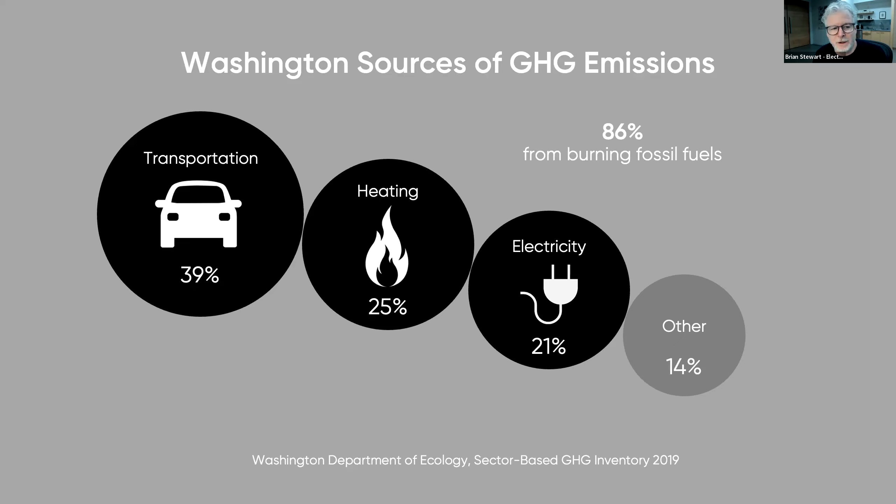The other thing that's really inherent in this chart, that might not be obvious at first, is that the reason why these three bubbles are so big and cause so much carbon emissions is because historically the only way we've been able to achieve these benefits of transportation, heat, and electricity has been from burning fossil fuels. So that is where these carbon emissions come from. But now there are new sources of energy that we can use for all of these things. And today we'll be talking, like I said, about heating.

If we look at our own homes and look at the picture in our own homes, it's similar in what you see. It's organized a little bit differently, but the energy that we consume for these same three things, electricity, transportation, and heat, accounts for about 60% of the carbon emissions in a typical home anywhere in the United States. The other portions of our carbon emissions come from the products that we buy.

So think of it as merchandise. Every time something arrives from Amazon or whatever, there's carbon emissions associated with making that and getting it to our homes. And then there's carbon emissions associated with the food we eat, and that being transported around the world too. And these two smaller boxes on the right, we can, through diligence and consuming fewer things, buying things locally, buying organic or regeneratively raised produce, all these things can help reduce those two boxes on the right, but it's hard

to eliminate them. But this big black box, the 60%, it's entirely possible to make that go to zero, to eliminate all the energy-related carbon emissions in your home. We've done it in our home. Sounds like our guest speaker tonight has done it in his home as well, and we'll be able to talk to you about why that's possible and why it's actually a great thing to do, and it's no compromise.

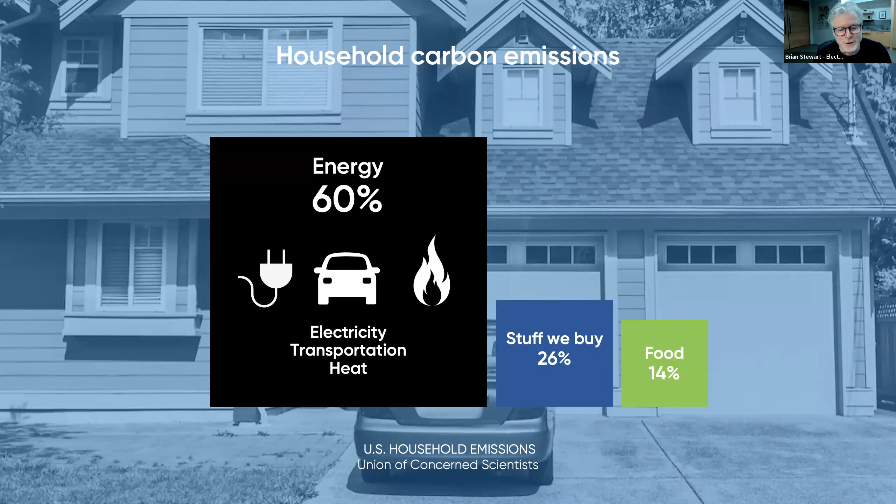All right, so the reason for all this is that electricity primarily has been using coal and natural gas. Of course, here in the Northwest, we have a lot of hydro and more and more solar and wind, but historically it's been coal and natural gas. We use gasoline and diesel for our transportation, and natural gas, and to some degree propane, more in the rural areas, to heat our homes and buildings.

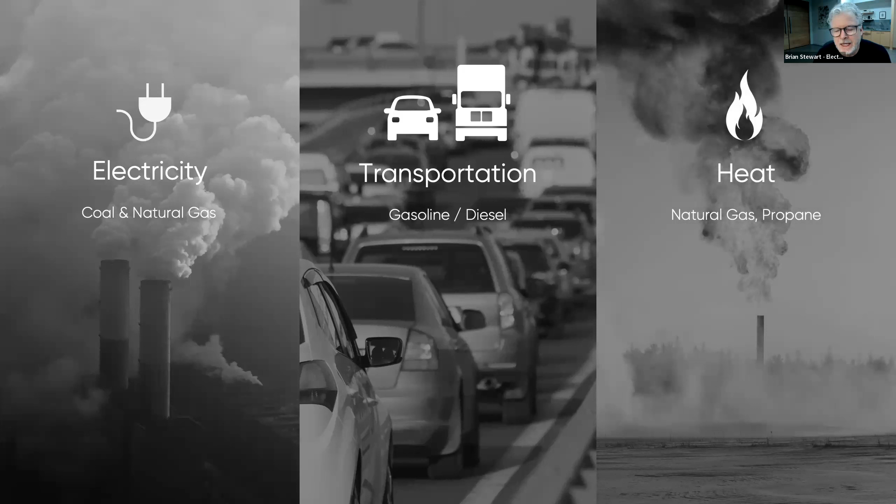I like to focus on the heat part because I think everybody gets that coal plants are bad, and you can smell the pollution from your car every time you turn it on, but most people don't have the same kind of awareness about how bad natural gas is for the environment. It's similar or worse to coal, partly because so much of it escapes from the devices that we own, from the pipelines that carry this under really high pressure over massive distances. So when you add up all those, what they call fugitive emissions, plus the combustion, it's similar or worse in some cases than coal in terms of its impact.

It's one of the major sources of air pollution. Again, it's not something we talk about because we're aware of that smog that comes from traffic, and if you have a power plant nearby, you can see it coming out of the smokestack, and you don't really see this pollution that comes from our homes, but it's one of the largest sources in California, for example. It's becoming the largest source as their electricity gets cleaner and their transportation gets cleaner.

And then the other thing is that there's a lot of misinformation out there, primarily coming from some of the gas industry, about things like renewable natural gas, which are good products. It's a good idea, renewable natural gas, but there's nowhere near enough of it, and it won't save us from having to get off of gas. It's got some good uses, but it's not the equivalent, let's just say, of solar power or wind power, where we'll have clean electricity flying down the electric lines.

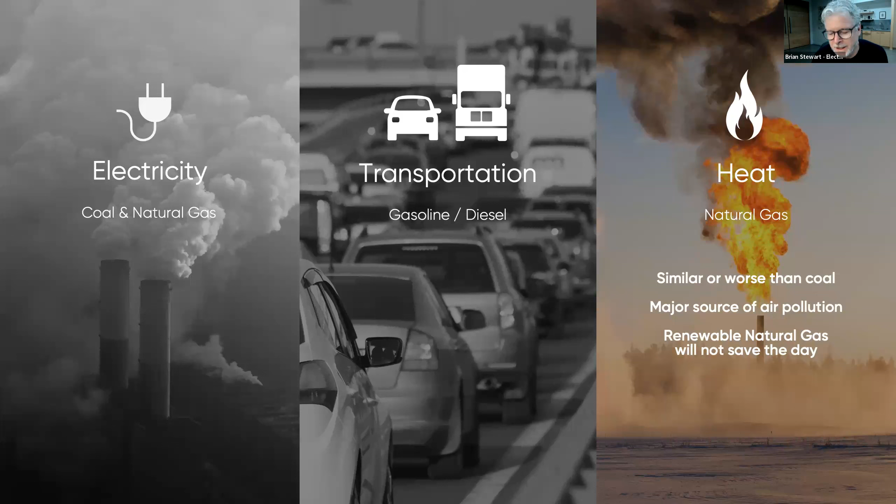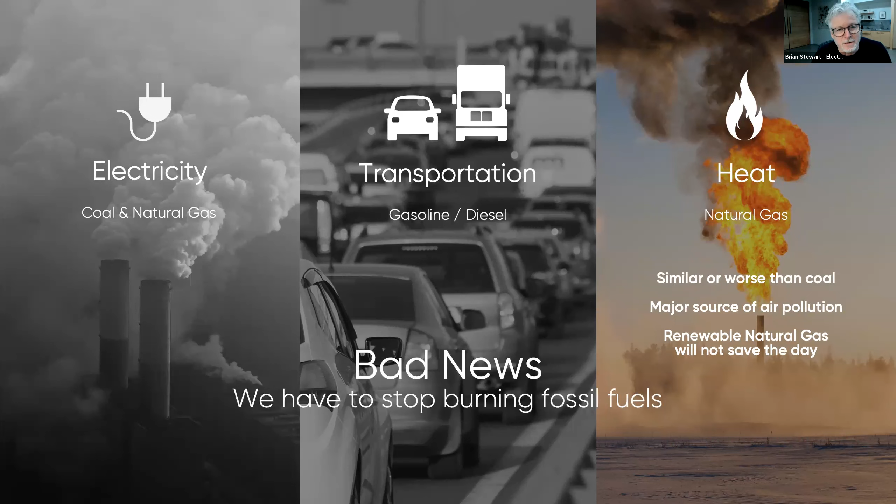And that's what's happening with solar panels. They're getting cheaper and cheaper to make. They get more and more efficient all the time. The same thing's happening with wind turbines. We're finding ways to make them for lower costs and make them much, much more energy efficient in capturing energy from the wind. So that drives costs down. And the more of them we make, the better we get at it, the cheaper it gets.

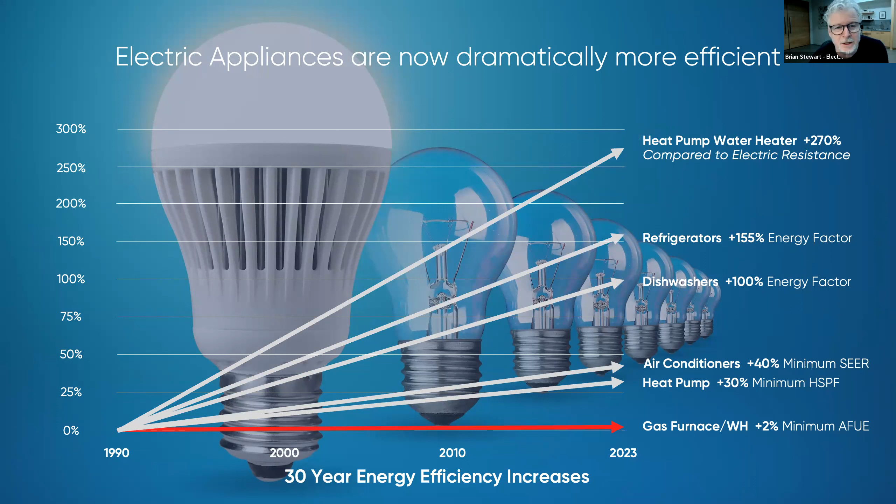And a heat pump water heater, which we're not going to talk about too much today, but it's another amazing technology that you should be familiar with, is incredibly energy efficient. It's almost 3 times more energy efficient than an electric resistance water heater. And then LED light bulbs, which of course, I think are almost the poster child for energy efficiency and electrification. They use 1/5, or you can say they're 5 times more energy efficient than an incandescent bulb, and they last longer and have all these other benefits.

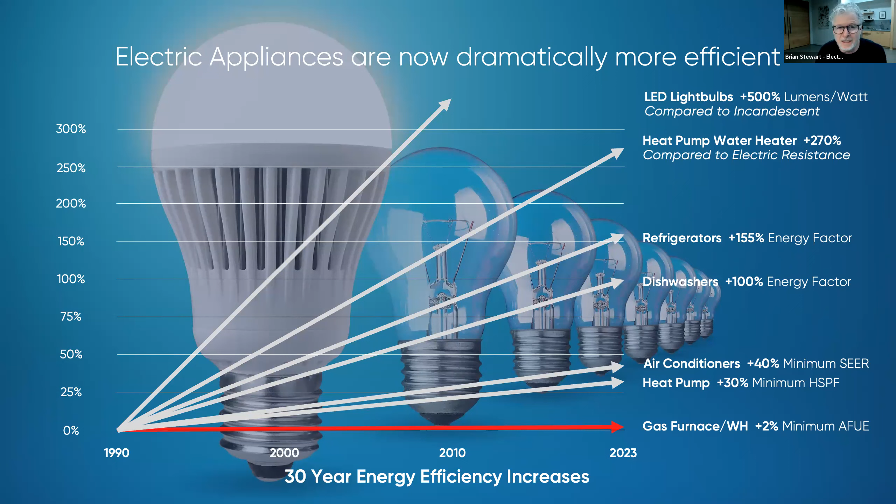So with all that news, like cheap renewables, really efficient electric devices that do everything that we need them to do, you almost can't escape this idea that we should be electrifying everything. And you'll hear that terminology being used. And it's really conjuring up this sustainable future where the wind and the sun power all of our primary energy needs: electricity, transportation, and heat. And by the way, transportation, I hope you guys are seeing some of those Amazon electric vans starting to deliver products to your home with really high efficiency electric devices, but that's happening as well.

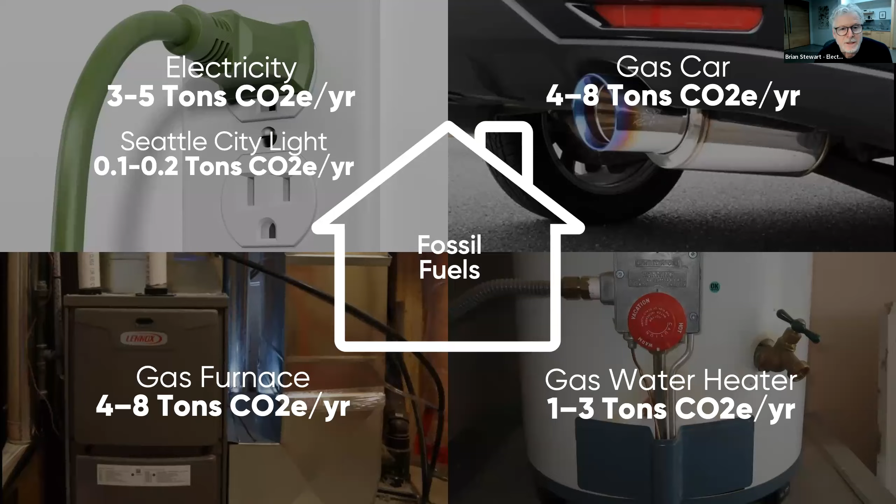Okay, so let's compare that to a home that's using renewable energy and has electrified, and you could be getting 100% renewable electricity. Like I say, Seattle City Light is very close to that already. With renewables, you would be getting 0 tons from your electricity use. And then you charge your electric vehicle with that clean energy. That means it's producing 0 tons, driving thousands of miles a year with no carbon emissions. You can heat and cool your home for 0 tons of carbon emissions. And you can heat your water also with 0 tons of carbon emissions.

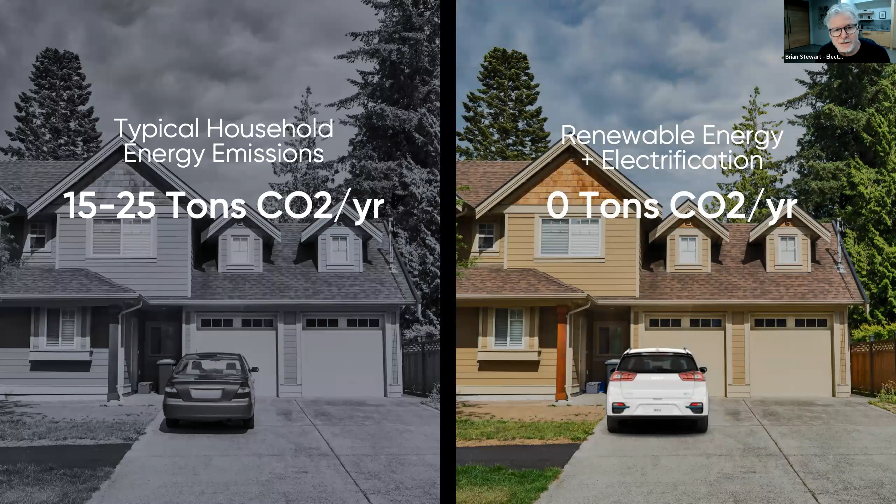And so, we'll be hearing from someone who's done this in their own home later on. But this is amazing. Think of this comparison from today, where a typical home in Washington would produce somewhere between 15 and 25 tons of carbon emissions per year from the energy that we consume, and a renewable energy plus electrification home, that's 0 tons. But the other dramatic thing that happens is energy costs go down quite substantially.

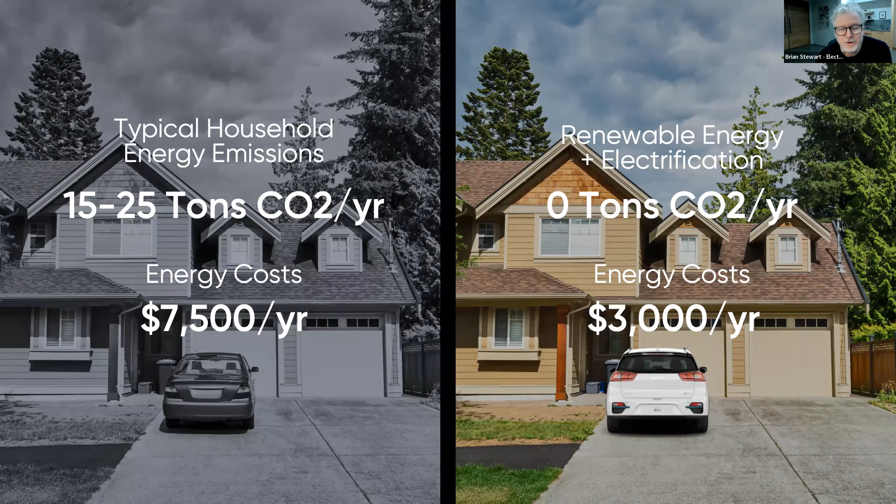For a typical home with 2 cars, you would be expecting to pay about $7,500 a year between your electric bill, your natural gas bill, and the gasoline that you purchase to put in your cars. And that would compare to $3,000 if you had 2 electric vehicles and a heat pump water heater, etc. So, $4,500 a year saved from energy costs after you've made this transition, which is why, again, there's so much interest in this topic.

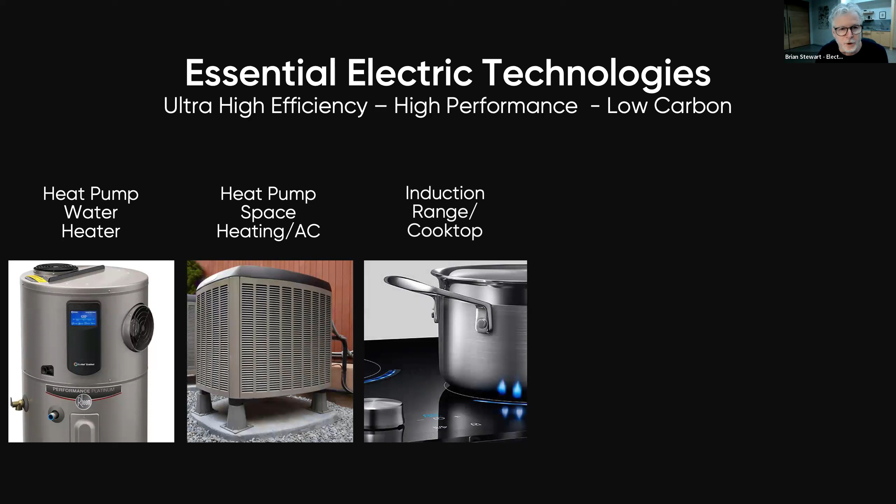All right, so the technologies that make this possible in our homes are heat pump water heaters, which I've mentioned, heat pumps for space heating and also for air conditioning, induction ranges and cooktops for cooking to replace gas stoves, electric fireplace inserts, which will replace gas fireplace inserts, and heat pump dryers, which are the most efficient way to dry our clothing, and then electric vehicles, as we mentioned. So today, we're really only going to be talking about heat pumps for space heating and air conditioning.

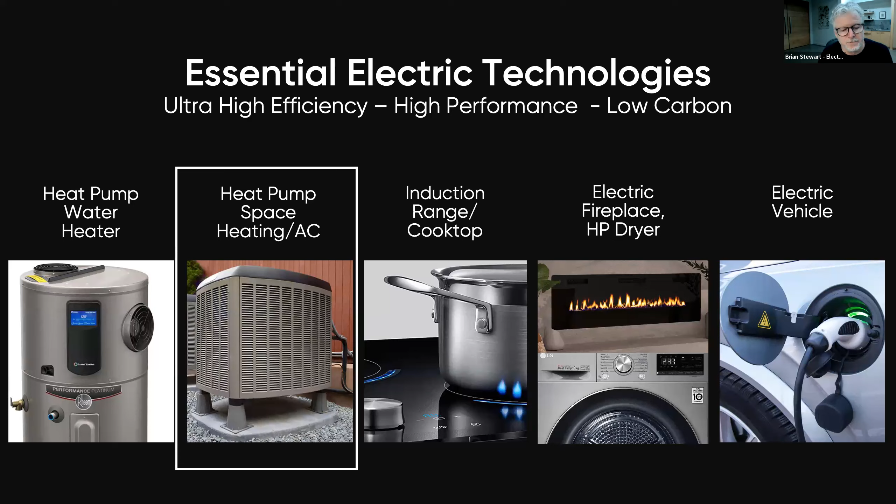But all of these devices deserve the same kind of attention because they're all amazing in terms of their ability to provide really great performance and also reduce our energy expenditures. Okay, so heat pumps for space heating and air conditioning. It's important to know that this is not some kind of compromise or some sort of second best way to keep warm. This is actually a better technology because, for one thing, it provides heating and cooling with one system.

So gas furnaces, of course, can't do that. And air conditioners tend to be lower efficiency than heat pumps, which we'll talk about. So there's energy savings on the cooling side and on the heating side with heat pumps. They provide incredibly constant temperatures, and that's because they operate almost continuously. And that means that if you set your thermostat to 70 or 72, whatever you're comfortable with, it's going to stay exactly that temperature, and it will be that temperature almost throughout your whole home.

Whereas a furnace, which produces huge amounts of heat, has to turn on and off and on and off. And that means that the temperature in your home, you set your temperature at 72, for example, is probably going to go up to 74 and then down to 68 and then up to 74 and down to 68, etc. And that means that it's only on for a short period. So it's really warm next to the registers and not so warm on the other side of the room. Whereas with a heat pump, it's moving all the time.

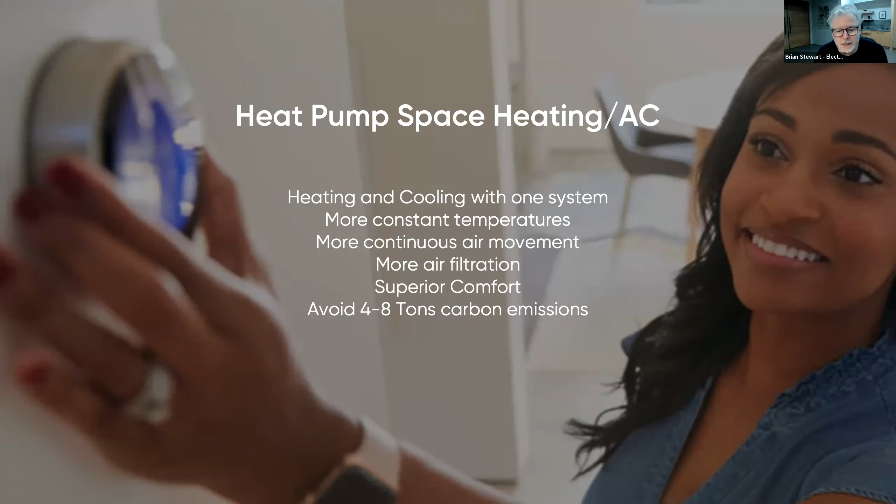The air is moving through your house all the time. So it's going through the air filters more continuously, which means you have really clean indoor air, more air filtration. All this adds up to superior comfort, people report, and there's dehumidification benefits that come along with this as well that are sometimes important. Not so much in our climate, but in some areas that's really important. And all of this comes along with a 4 to 8 ton reduction in carbon emissions per year. So it's pretty dramatic.

Heat pumps can sound pretty, I don't know, science fiction-y and hard to explain to people. And I won't go into the physics because it is a little hard to explain. But on the other hand, these devices are things that are super familiar to us. I mean, our refrigerator is a heat pump. The way it works is it's moving heat from inside that closed box to your kitchen. So maybe you felt that warm air coming from behind the refrigerator, or sometimes it's blown from underneath. So it's slightly warming your kitchen and you barely notice that. But inside it's dramatically colder. Obviously in the freezer, it can be down to 0 degrees.

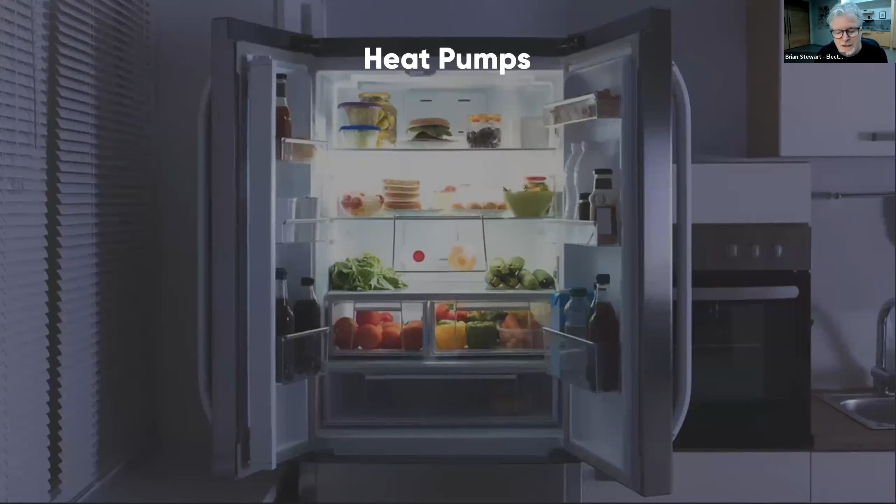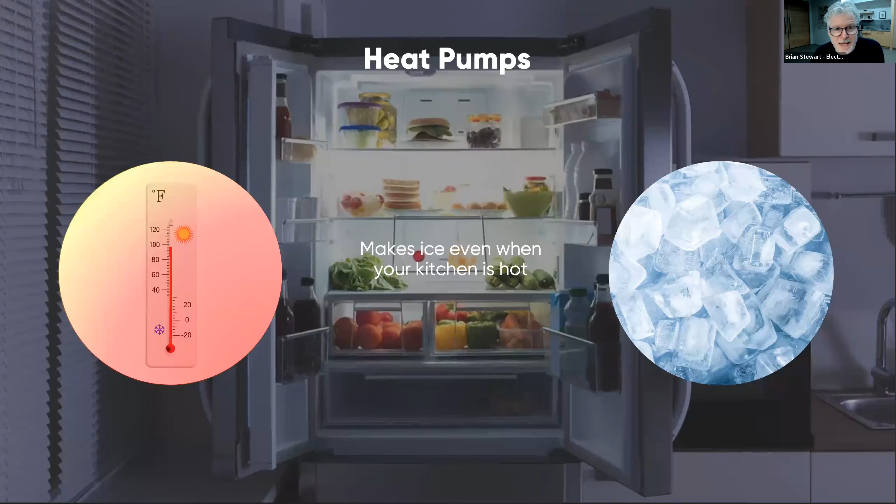And so these things are so effective that even when it's really hot in your kitchen, like during the heat dome that was well publicized here a couple of summers ago, before we turned our air conditioning on, it was almost 100 degrees in our kitchen. And yet our refrigerator was still making ice. So it's a huge temperature difference that these things are able to achieve and work within. And as you'll see, heat pumps for space heating, or heat pumps like this device in your refrigerator, can work both directions. They can heat and cool.

And so heat pumps for space heating use, again, this same technology of these little pumps that are moving heat from one place to another, but they come in a couple of different varieties. If you have a gas furnace in your home today, that means you have ducting that goes through your home and you have air vents where the warm air comes out into your rooms, then you would most likely opt for a ducted, or what's often referred to as a central heat pump. And these things have 2 major components. They have this external unit that looks a lot like an air conditioner unit, if you have one of those today.

It sits outside your home, and it's the thing that's harvesting energy from outside in order to heat your home, or taking energy from in your home and dumping it outside if you're trying to cool your home. And it connects to what's called an air handler, which basically would replace your furnace. It sits in your basement or your utility room, is connected to your ducts, and it's the thing that's blowing the air back into your home.

And it's connected to this outside unit with these refrigerant lines that move the heat basically back and forth from one place to another. So one of the things that's really nice about these units is you can put these big 4-inch air filters on them, or you can even get HEPA filters, if you're really concerned about indoor air quality. We geek out about it.

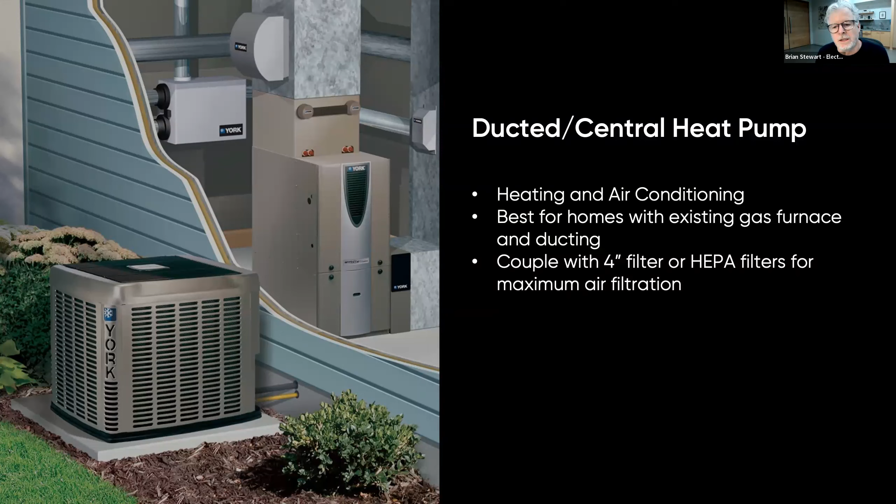But it's really important, if that's something that matters to you, that when you're talking to the contractor, make sure that they're going to put in a 4-inch filter, not a 1-inch filter. They're not useless, but they're not great. The difference between a 4-inch filter and a 1-inch filter is dramatic in terms of the cleanliness of your indoor air. So this ducted system is best for homes that have gas furnaces now and existing ductwork.

Maybe you live in a home that has electric baseboard heating, so you don't have ducts. So you can't use one of these central ducted systems. You need to use what's called ductless systems. And we have one here in the studio that I'm in. That's what's up there on the wall. I don't know if you can see it. It's probably small for you to see, but in this picture, this unit on the wall is called a mini split, or sometimes it's called a high wall.

It's the thing that's blowing the warm air and the cool air into your room. It's connected to an outdoor device that's similar to the one that we just talked about. They sometimes come in this more suitcase size. The ductless ones are super efficient and look typically like that. These are great for homes that have baseboard heating now. They can be awesome to reduce reliance on gas heating. Maybe you put one of these in your main living area and you still have gas for the rest of your home. That's sometimes possible.

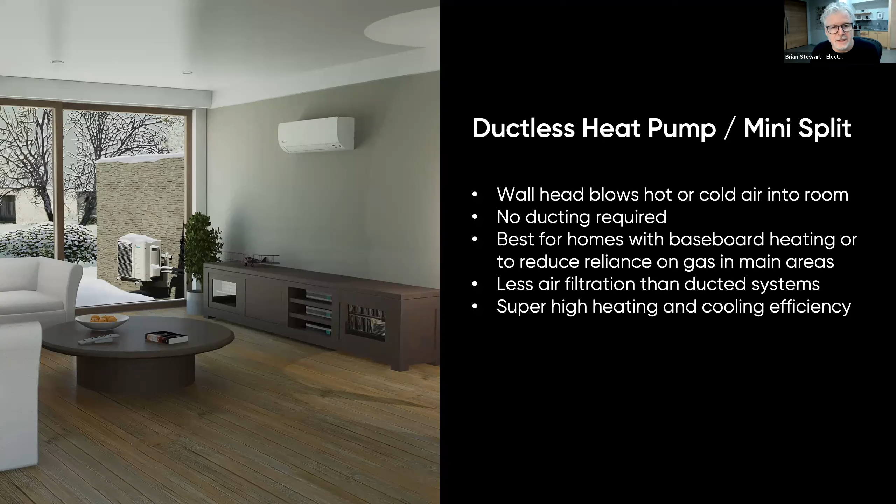The one drawback of them, I don't know if it's a drawback, it's just something you'd be aware of, is that while they have incredibly high heating efficiency, these ductless units are the most energy efficient devices that exist, they have less air filtration because you can't put in a 4-inch filter. So if you go that way, I highly recommend that you get one of these home air purifiers.

They're really cheap. For $250, you can get one of these that will take care of several rooms, and you can get smaller ones that are great for bedrooms and that sort of thing. And they're incredibly effective. They take very little energy. Consumer Reports has really good articles that rate them, and they're made by multiple brands. I highly recommend these devices because they're great, particularly during wildfire season. And you kind of need this if you're going with the ductless variety.

And then, of course, combinations of those systems are also possible, where you might have a ducted system, but maybe you've got a ductless mini split. Maybe upstairs, if you've got an older home that isn't well served from the central vents, sometimes it can be good to put one of these mini splits upstairs to cool the upstairs and heat the upstairs while the vents are taking care of the lower floors.

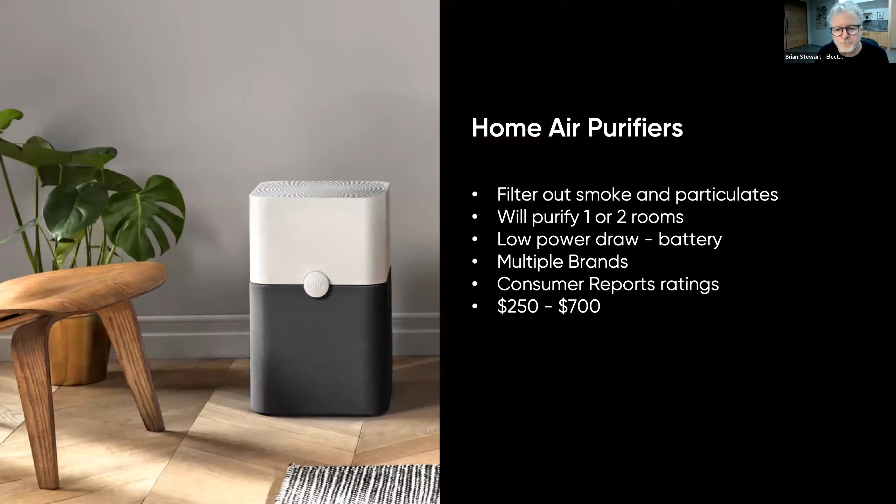There's another thing that's interesting that you might want to be aware of. They're called portable heat pumps. These are small units that either fit inside windows, or in this configuration, it's kind of a roll-around unit that blows air out through windows through this kind of vent kit. They're quite cost effective, for about $600. They can give you really good supplemental heating and cooling.

I mean, they don't have the same kind of power as these two devices we were just talking about, and they don't work when it gets really cold. But they're a great way to use less gas or baseboard heating. In most of the year, they're going to be effective, but in the coldest months of the year, they're not going to help very much. But these things are kind of a cheap way to get into the whole world of heat pumps.

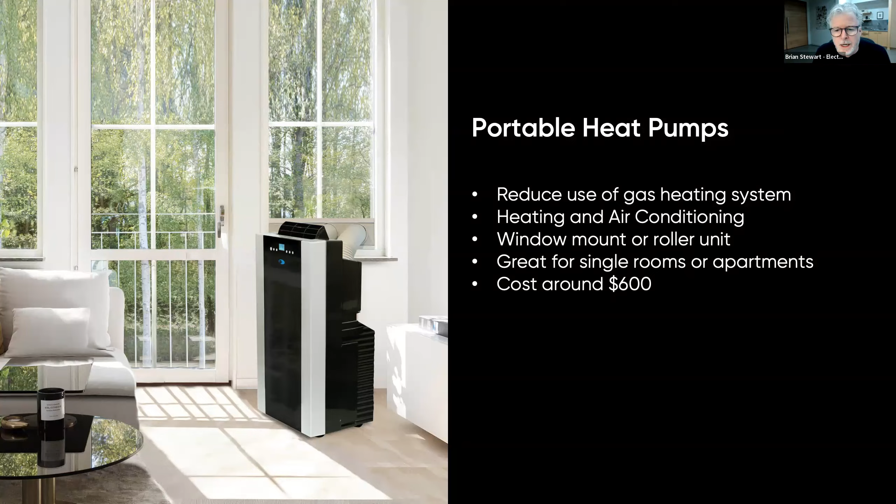Okay, so a lot of people hear, oh, hey, I've heard about heat pumps, but I heard they just don't work in our area because it's too cold here. And that's just not true. That was kind of like old news. It's sort of partially true, because originally heat pumps came into this country primarily for the southern part of the country, where cooling was the main problem.

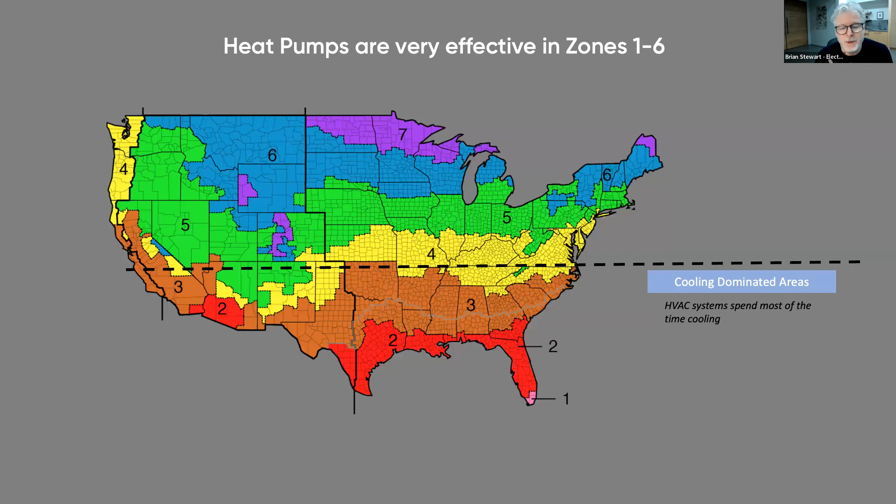And a little bit of heat was needed, in December when the temperature plummeted to 70 degrees, you had to have a little heat. So that's why heat pumps were really popular in the South. They still are, but that's a different device than what's needed where we are. So these units that were imported for areas where it's warm were meant to maximize cooling efficiency, because that's what they were used mostly for, and they just needed to provide a little bit of heat.

Where we are in the northern part of the United States, we need the other way around. We need a device that provides a lot of heat and is pretty decent at cooling. And so the products that we need are different than the products you need in the South. And part of the reason for this mythology that they aren't effective in cold areas is because maybe people try to use one of these units from the South in the North, and it doesn't work.

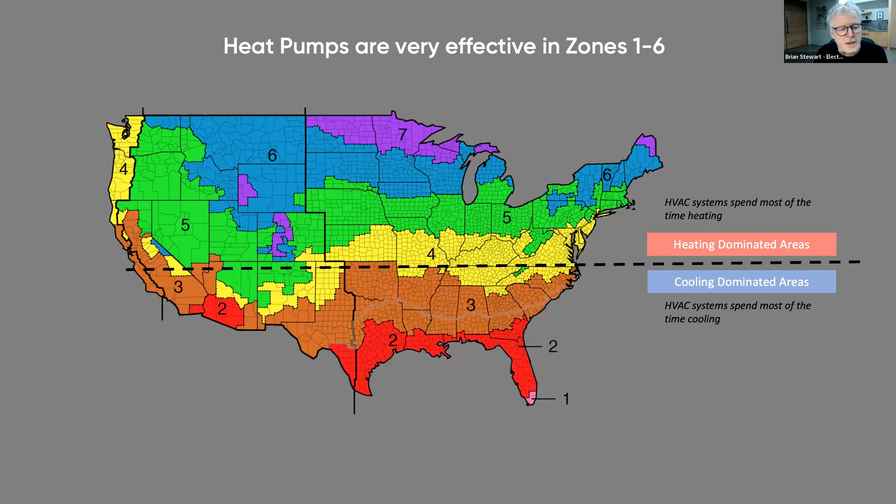But these heat pumps are being used in the very coldest parts of Vermont and Maine and Alaska even. So they are totally effective everywhere really in the United States, but especially in our more relatively temperate climate. Heat pumps are fantastic.

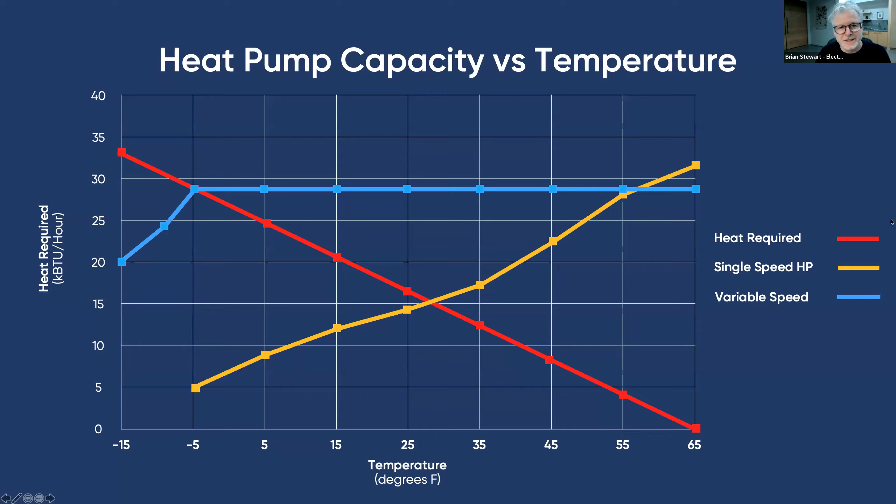So that's just a little bit of the technical geekery. Sorry to go too deep into that, but suffice it to say that pretty much every manufacturer out there makes a good one, just like the kind that you're going to want, a variable speed heat pump that's good down to low temperatures. They come from multiple manufacturers.

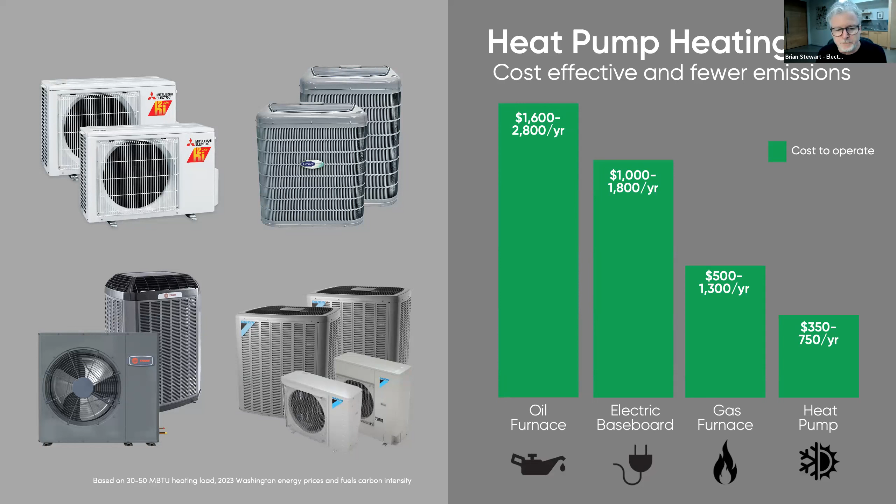They come in a lot of different configurations we won't talk about today, but when you're in the process of getting quotes, this is something you might want to talk about, because those external units might look like this, which might fit in your external space really well, or they may look like this, which just doesn't fit, where maybe you've got a space that's really narrow between your house and your neighbor, and these larger units won't work, and so you need one of these more narrow sizes. So all these things are considerations when you actually get down to choose a product. But there's lots of options, and they're all really good quality.

But let's talk about cost. If you have an oil furnace, and I know there aren't that many homes that still have oil heating, but man, if you do, you should be thinking about this right away, because oil furnaces are one of the most expensive ways to heat homes. You can see typically in Washington State, depending on the size of your home, et cetera, it's going to be somewhere between $1,600 and almost $3,000 a year just to heat your home.

Electric baseboard is also incredibly expensive. $1,000 to $1,800 a year is not uncommon for a typical home in Washington. And this is why gas furnaces have been popular, because they're so much cheaper than these other two alternatives, which are sort of the old devices that were available. And this range from 500 to 1,300 depends partly on the size of your home, but also on how new and how energy efficient your gas furnace was.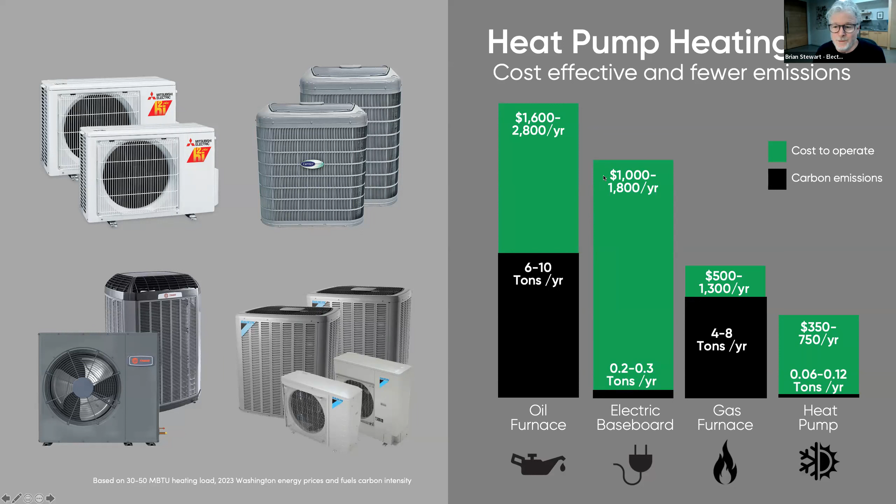Okay, from a carbon standpoint, though, there's no contest. Electric devices, partly because you have such clean energy in Seattle City Light territory, a heat pump is creating virtually zero carbon emissions. And even electric baseboard is not bad in Seattle City Light territory, but what's bad is how much you have to pay for it. And you can see that compared to a gas furnace or an oil furnace, these two electric devices just blow them away. And this is, again, why the heat pump comes out on top, because it's more comfortable, it's cheaper to operate, and lower carbon emissions by a long shot.

Okay, so I hope that makes you excited about actually doing it in your home when the time's right. But let's talk a little bit about how you might want to think about doing it.

I highly recommend taking the time to get a home energy audit. Lots of good HVAC contractors offer this service, and now you can actually get a federal tax credit of several $100s, because usually it costs a couple $100s to do this. Some people will do it for free, but some people will charge you for it. And the people who charge you for it are doing a more detailed version, so it's worth the money. You're talking about a couple $100 probably,

but you'll get a really good idea of whether you need any insulation in your home, what the state of your electricity supply and your wiring is, what issues you might face if you're going to electrify that you just need to be aware of. They can give you some idea about what order of operations you might want to think of things. Like maybe they would recommend, hey, if you replace some windows or some doors, you might really save a lot of money in terms of your energy expenditures. All this stuff is really good to know with the home energy audit.

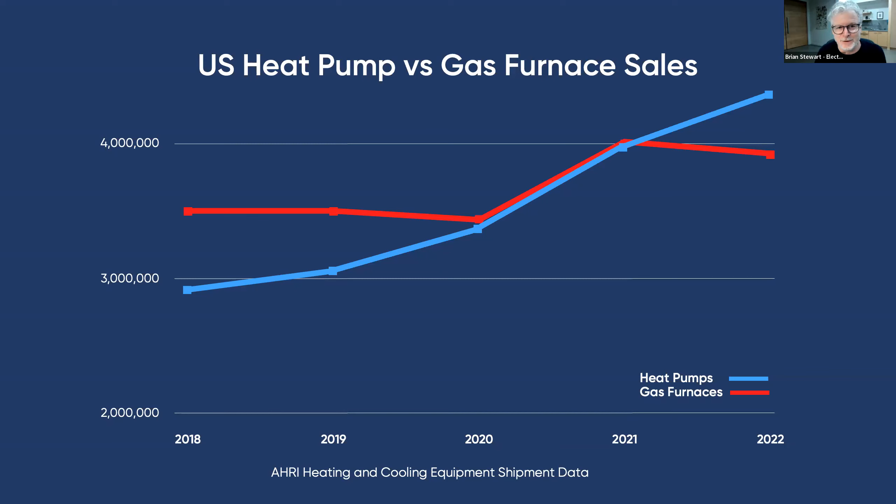But this chart shows you what's happening in the United States just over the last 5 years. As people become more and more aware of how great heat pumps are, you can see they've gone from second most sales to gas furnaces to more than gas furnaces. It's completely flipped. And all the data for 2023 is even more dramatic in terms of how they're outselling gas furnaces as more and more people become aware of just how great they are. So I just don't want you to feel like you're on the cutting edge or something like this. This is a movement that's just getting more and more momentum every day.